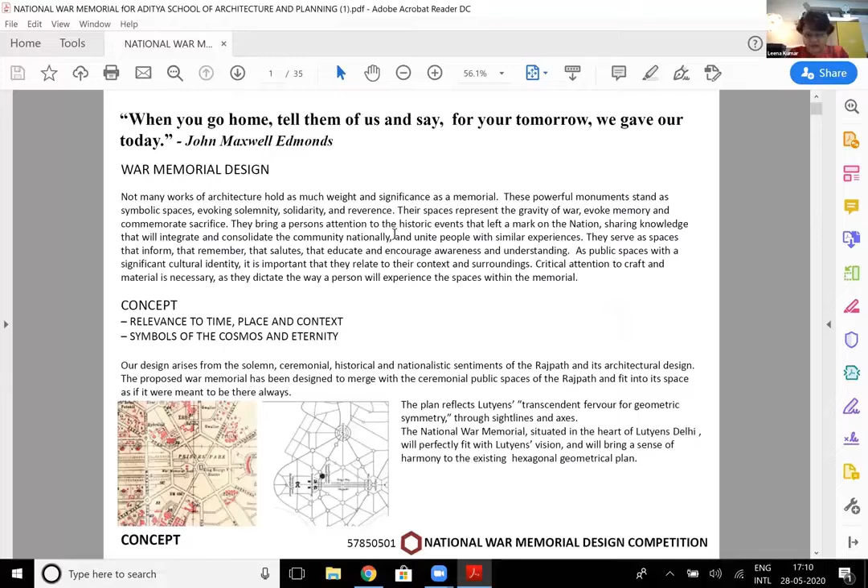And after that, everything about the country begins to make sense. This was a National War Memorial, to be placed in Lutyens' Delhi, in an extremely significant site along the Rajpath Marg.

You have the India Gate, then the Chhatri, and in line with that was the War Memorial. It was on 26 acres of land, in one of the most significant areas of the nation, on one of the most significant roads that every Indian will remember, because you see the Republic Day parade, the Independence Day parade, and it's all about this fantastic road full of history with the Parliament House, which dates back more than 100 years.

And now, of course, there's the great controversy about redoing this whole area. I personally think it's a good one.

So we began with doing a study of the whole space. We said, okay, this is in a very significant area, and we did a study of Delhi, of Lutyens' Delhi. From there, we see that all of Lutyens' Delhi really is based on the hexagon.

His whole master planning, his whole system of gardens and everything, is on the hexagon. So we began with the symbol of a hexagon.

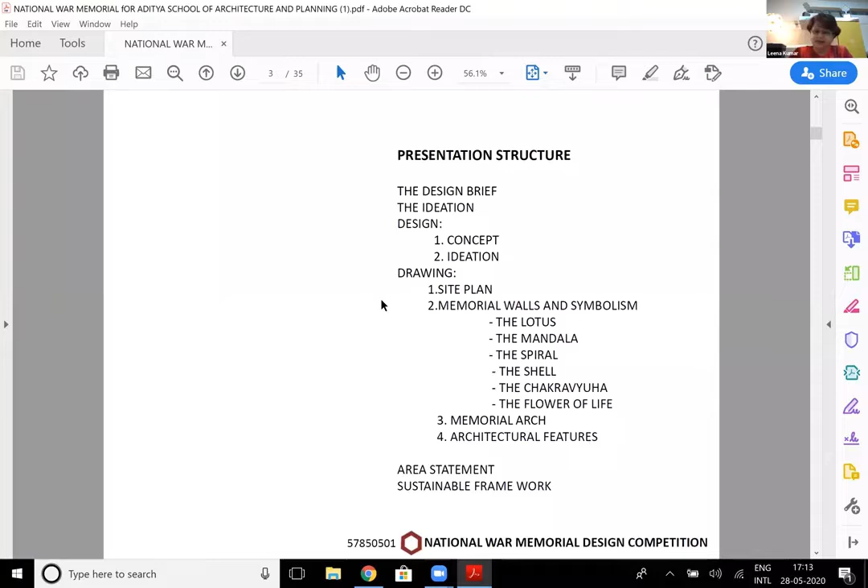We also said that we, as a nation, as a people, have a lot of symbolism in our religion and in our day-to-day lives. Everything is symbolic. If you see any of our festivals, it's symbolic. As Indians, we don't have Mother's Day or Father's Day, but we have so many religious days where we think about our ancestors, where our parents are of prime importance on a particular day, where we really delve into all of it. As a people, we are very symbolical.

This is the design of it. This is the India Gate, and this is the Chhatri. We'll come later to when we design a central monument around the War Memorial that we proposed. Our symbolic element fit within the India Gate, and within what we had designed was a Chhatri. We'll come to that later.

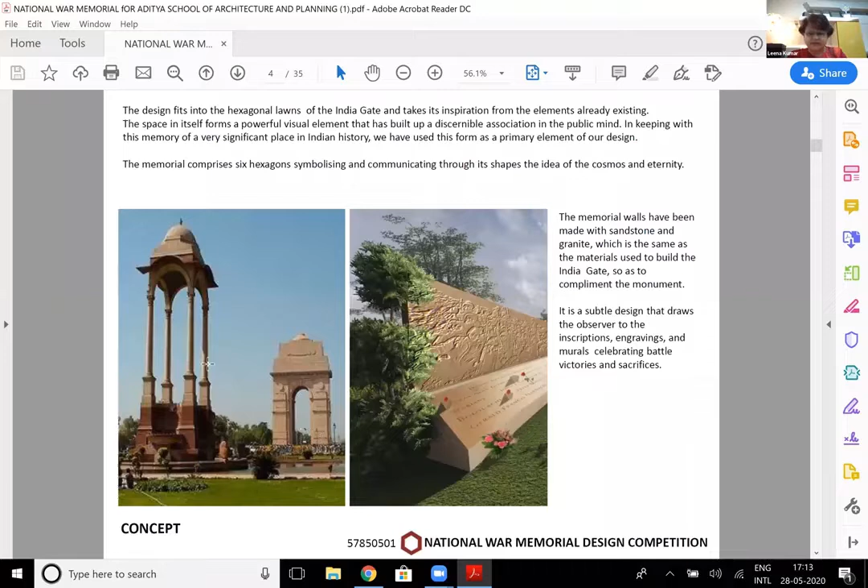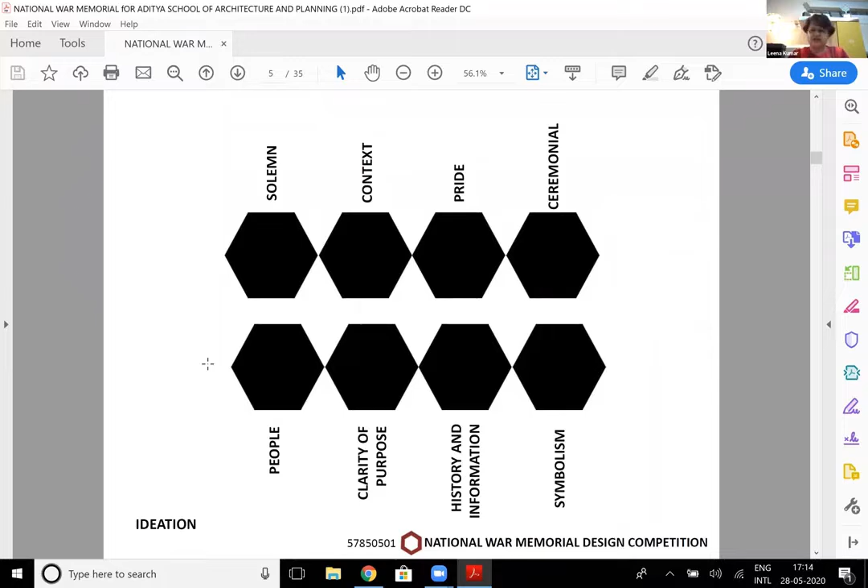Well, we began, of course, with the people of our country. What is it that we represent? What kind of a people are we? It was important that we did a design that really tied up to the nation. It was not something to be borrowed from anywhere. It had to be completely rooted to the people of India. It had to be solemn, and it must have history and information, symbolism, ceremonial.

This is the site. It forms part of a hexagon, and there were 2 lawns. Together, this whole area was about 26 acres of land.

This is the very famous Rajpath Marg. And in the center, right here, in line with the India Gate and the Chhatri, we had a big memorial arch. On either side of it, we had our memorial walls. This national memorial was for all the defense forces — not just the army, but the navy and the air force too. We thought each one could be dedicated to one of the forces, or if you had many of them, it could be dedicated to each particular war or a couple of wars together.

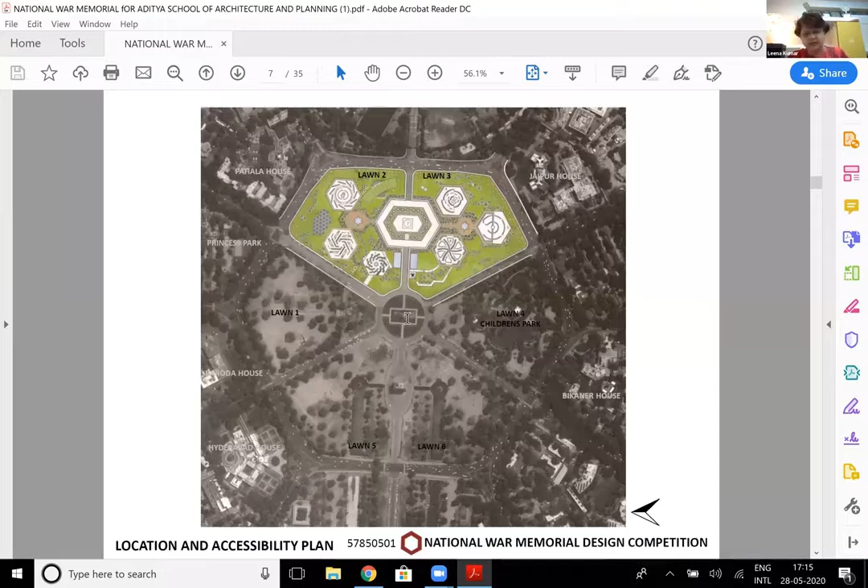So we gave them a choice, and we also distributed it into 6 areas, 6 zones, because we thought if you had everything into one, it might be just an overload. It's like going to a museum, and sometimes it gets a little too much.

All of our memorial areas began with the concept of the lotus, the mandala, the spiral, the shell, the chakravyuha, and the flower of life. In between this, we had the memorial arch.

We had an area where you could go and listen, with a lot of audio-visuals where you could hear the history of India, listen to the wars, and the memorials and what each one of them really represented.

So symbolism played a very important part of our design, but I'll go into the whole design itself. This was one of them — the lotus. It was contained within a hexagon, and this is a Buddhist symbol.

You find this symbol in many of our religious manifestations — not that the whole place was meant to be religious or affirming to anything like that, but as Indians these symbols have been a part of our growing up. I would say it's been a part of our everyday lives. We see it everywhere, and very subconsciously we identify with these symbols.

So this was one of them, the lotus, and it's really a symbol of strength in the middle of adversity, which is all what the war is all about.

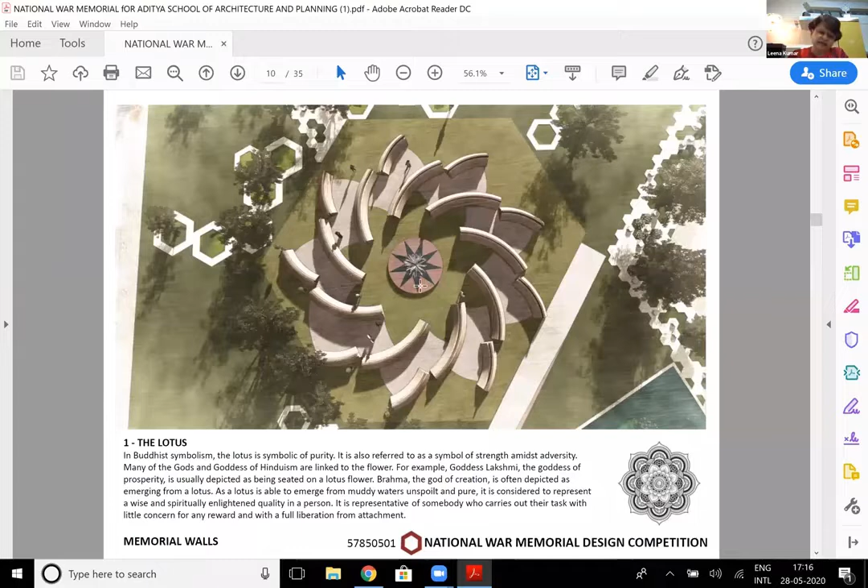These were all the memorial walls, with inscriptions on either side, always pointing out to the center, which really is the soul. We always had a water body in this. So this is one of the views of the walls.

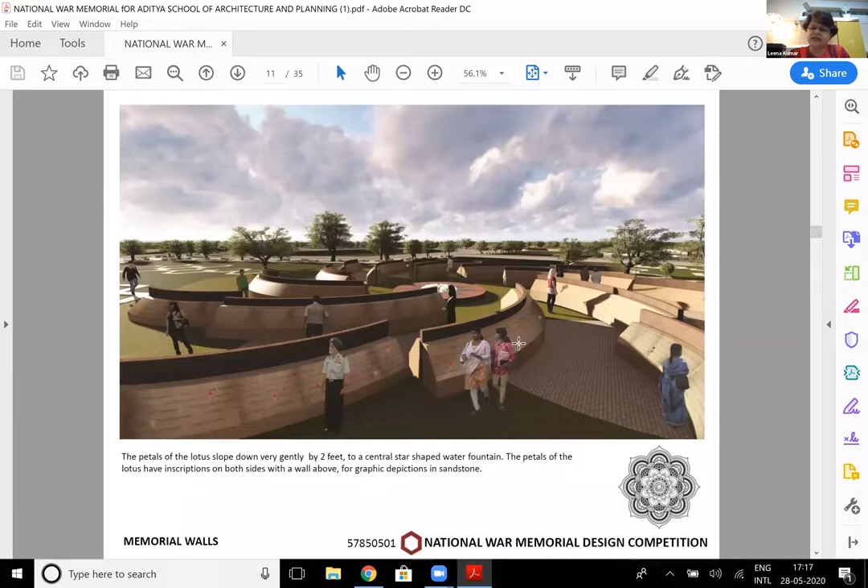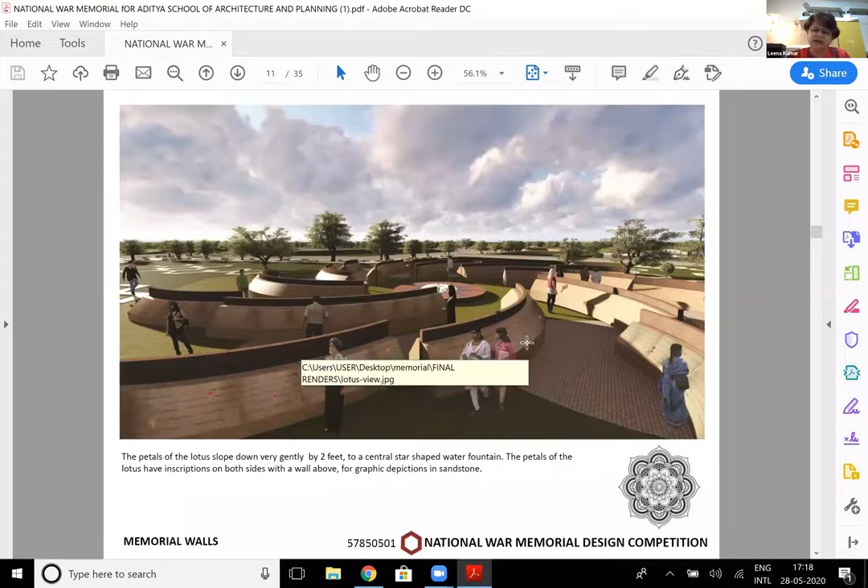You could also add some flowers, maybe some candles, so it becomes a lot more personal. We didn't want the walls to be very tall. We could have taken the whole site 4 or 5 feet below ground and had very tall memorial walls, but we thought as a concept it should be to a human scale—something everybody could stand and read very closely, so you feel closely connected, and it's not just names above your eye level that you can't clearly see.

The next one is the mandala. As architects, I'm sure we all know what the mandala means—it really represents wholeness, a cosmic diagram used very often in architectural language. In this too, everything congregates to a central water body.

Along this are benches where people can sit, with water bodies alongside. The idea was that if anyone comes here wanting to ponder about having lost a person, or someone close to them, or even if not, it invokes memories of war, of sacrifice, of courage, of a nation—if you want to ponder what makes us who we are, what makes our country tick.

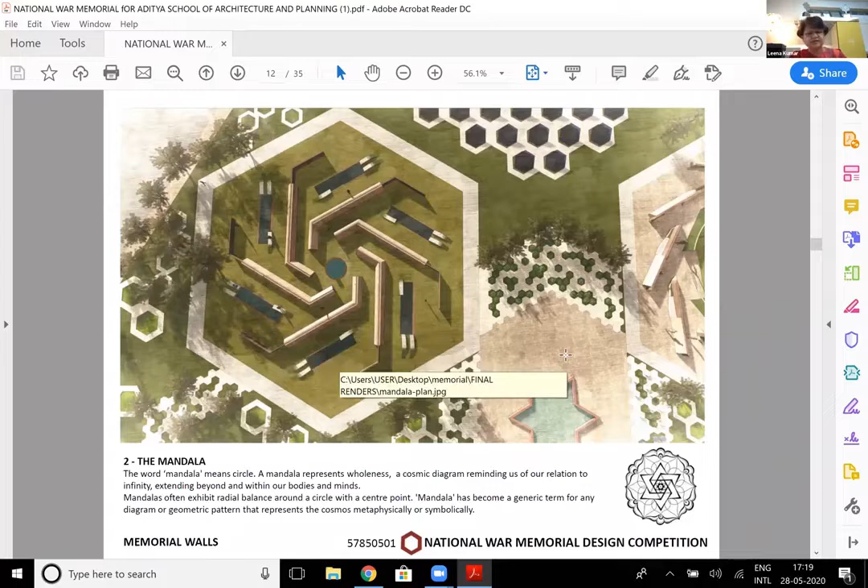We're quite a complicated nation, but in that complication we're quite a wonderful, intelligent, diverse nation. Amongst all our complexity there's such a rhythm of inventiveness, such a rhythm of personality and uniqueness. If you walk around our streets, every person is so different—we wear different clothes, we speak different languages. It's quite a nation, really. So these are all spaces where you could sit and reflect.

This was the mandala. In all of them, in the middle, we have a water body, which was to cool the space. Along the side we had nozzles to mist the whole place—that was our cooling device, because the site was open in the sun and Delhi is hot. In summer, you had to find some way to cool it, so we had water mist positioned throughout the entire 26 acres.

In this mandala, this is the seating I was mentioning—this was a water body, and along it we had seats. It ramps up from the lawn and becomes a seat. Every tree we planted was positioned with sciography, to see where the shade would fall, so that if you wanted to sit and contemplate, there was a place that was fairly cool and also under a tree. These were our seating devices and designs, spread around the site.

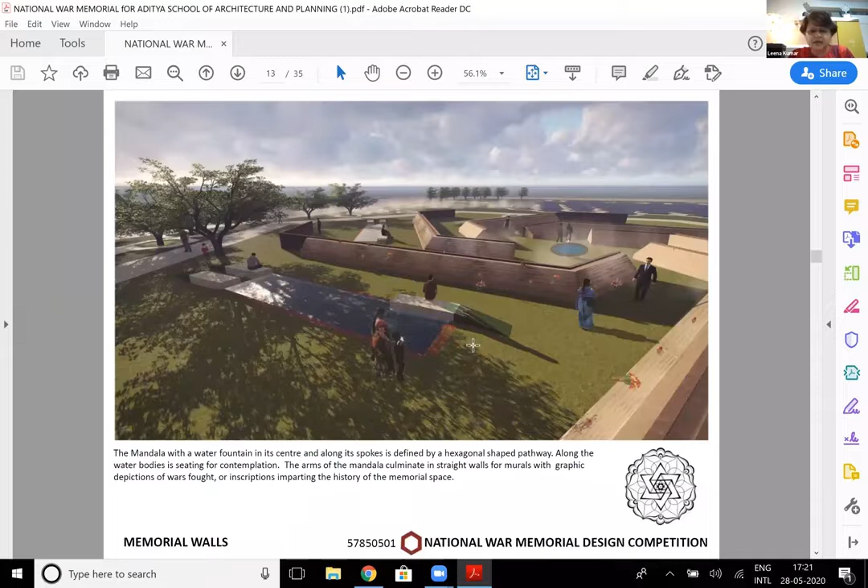This was the other one. This is the spiral. This also symbolizes cosmic rhythm, the way the universe evolved, as one of the theories.

In this one, these are all the walls that had the names of our soldiers, all the people we have lost. In the center we had a water body, a tree, and seating around the center. So you walked down, came here, there was some green, but the entire space was solemn, and that's what it really has to evoke.

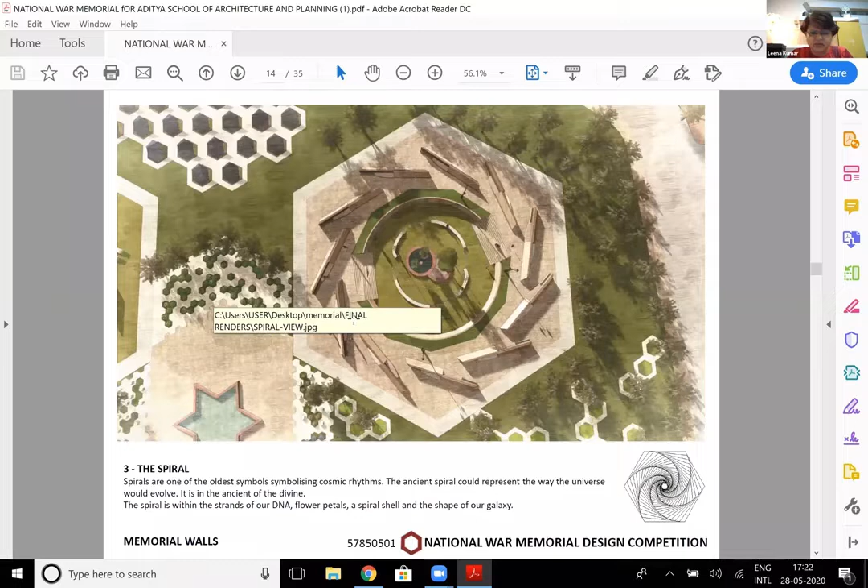And this is the design we had for our spiral. If you look at it, these are all the walls, and along the walls we had seating for people to sit, in addition to what we have in the center. So each one of our spaces was really a different form, so you also don't get fatigued by just seeing walls.

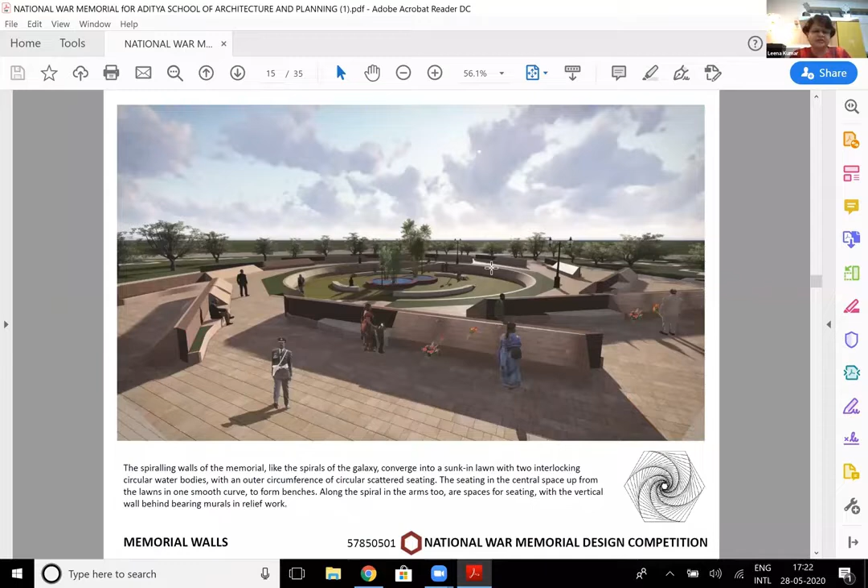Normally if you go to a war memorial, they're just walls and walls of names written. We broke it down into 6 spaces, each one with a different design, a different theme, each one very symbolic, something a citizen could adhere to and feel one with. Our whole intention was to make this really a war memorial that belonged to India.

It's not something you can take somewhere and transport anywhere else, because then it wouldn't really fit and wouldn't make sense to the citizens over there.

So this was the spiral, and the seating over here was different. A lot of it, this is the memorial wall, and then it became a seat at the end of it. And these are little places for people to put flowers, candles. This was the space in the center.

And this is the wall. This one, we came down a little bit just to make you feel like you're coming down into the center of a spiral, so we came down with steps.

And this again is the seating. We use seating that ramps up from the lawn, becomes a seat, and goes down again. So the whole thing tied up into one, and there was not much difference really between landscaping and the built form. The whole thing had to center in as one.

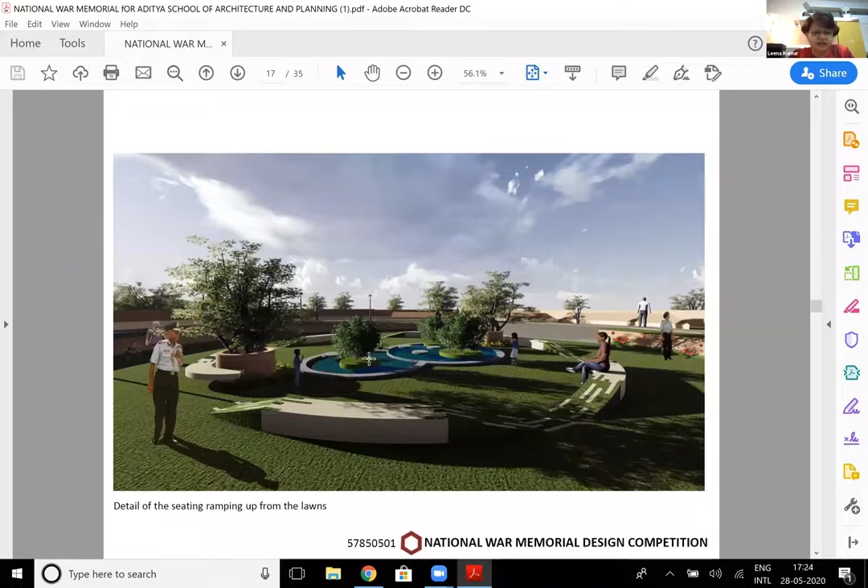So this is just the detail of what we did for the seating, and this was the 2 in the center. The whole idea, of course, was to cool the place and have it much cooler, especially where the seating is.

Now, all along these areas, we had solar gardens. It was where it could face the south west. It was also an area that didn't have many trees, so it could catch the sun, and it was designed so the angle of the solar panels could be changed to track the sun.

The intent was that the whole space was self-sufficient and self-reliant, and didn't really need power from the grid. On 26 acres there was a lot of space where we could have these solar panels, and we did this again in the shape of a hexagon.

We made it at a much lower level so people walked past it. People understood what solar meant, so you're just aware of energy when it's at your eye level instead of being somewhere else and tucked away. We thought this should really be a part of the landscaping itself, and that's how we designed these solar panels. We call it the solar garden.

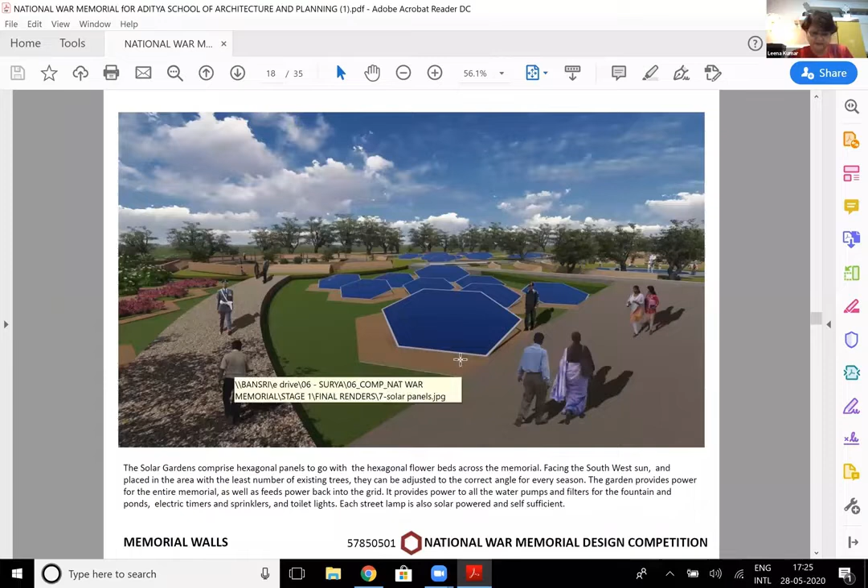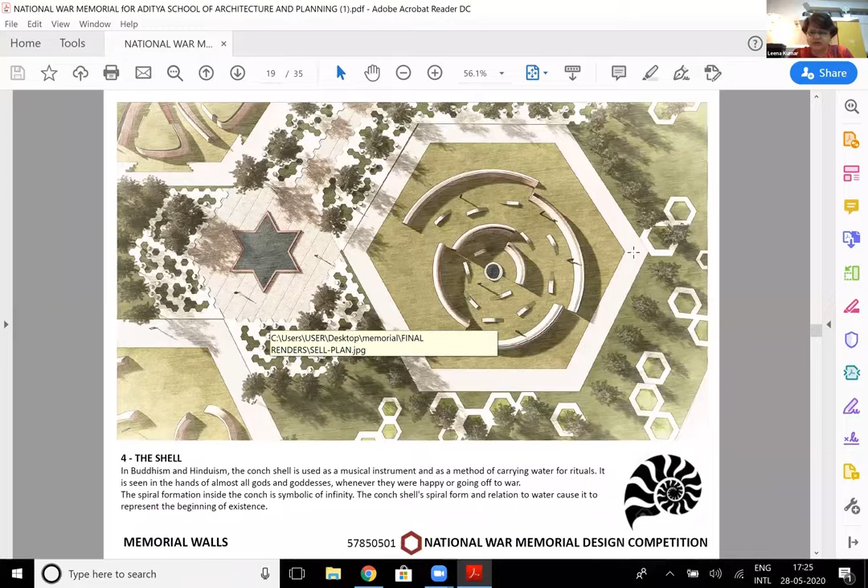This was another shape, this is the shell. We all know about the conch shell, it's an instrument used in rituals. You blow the conch to announce, very often, a war or a prayer that's going to start, and very often it was blown before you went to war. This is what this represented, and we had it in two levels.

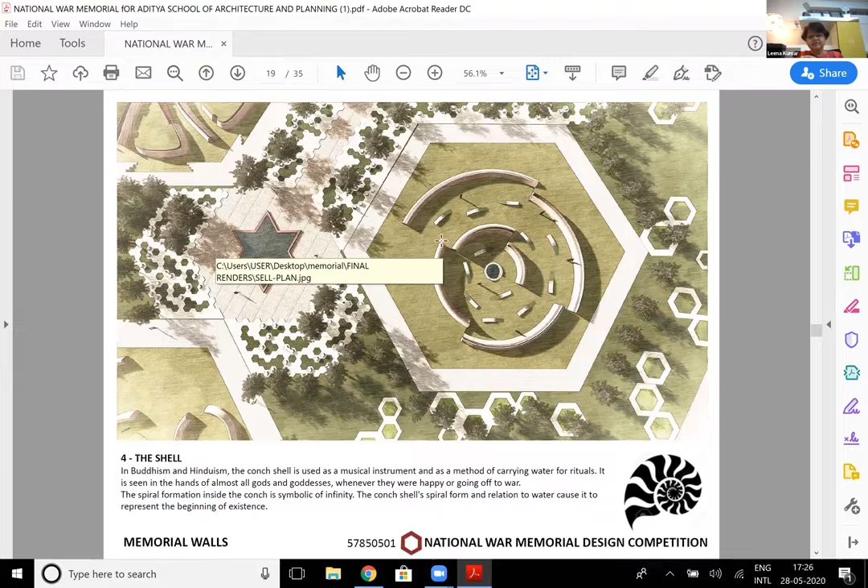With each one of them, we tried to make every one different, so a person's attention is always held, it's not monotonous. As you spend half an hour or 45 minutes on this, your attention is held and you can walk through the whole thing, because every time you enter another space, a different kind of design unfolds itself to you, and perhaps it evokes different feelings, always tying up to national integrity and the history of our country.

So, well, this is just another view, and we have the same seating. This is again the shell, and this is the area you can see.

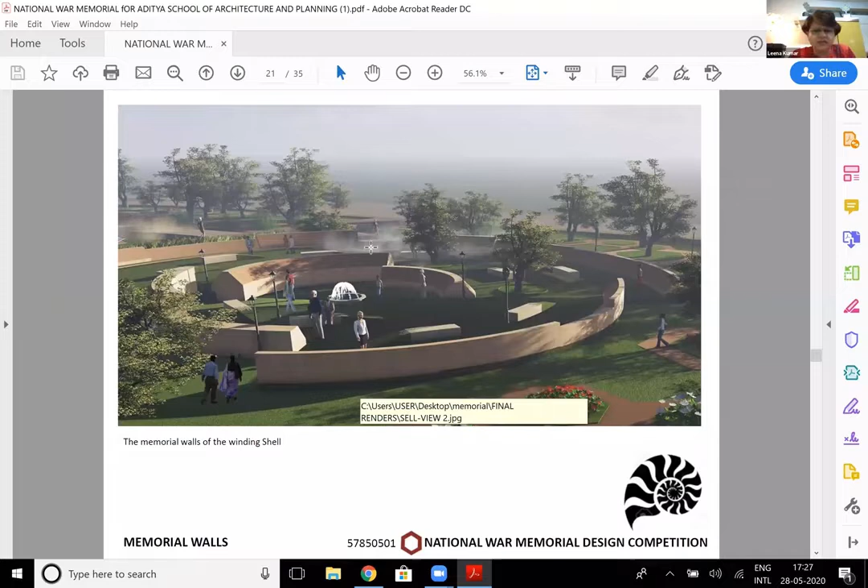So right around the site, we had points of mist. You use as little water as possible, just enough to put water vapor into the air to cool the space. When it does condense, it comes down onto the lawns. So this is what we tried to show over here, a bit of the mist. And see, if you look at most of our memorial walls...

This is the space where all the names are written, and above that we had an area for graphics. So we thought every wall would have murals on top, and the mural would really depict the war that was fought, or have inscriptions, or detail the history of what happened, why it happened, and all those who laid their lives down, to which war, which year it was fought. So there's a little more history, a little more interest than just going and seeing names.

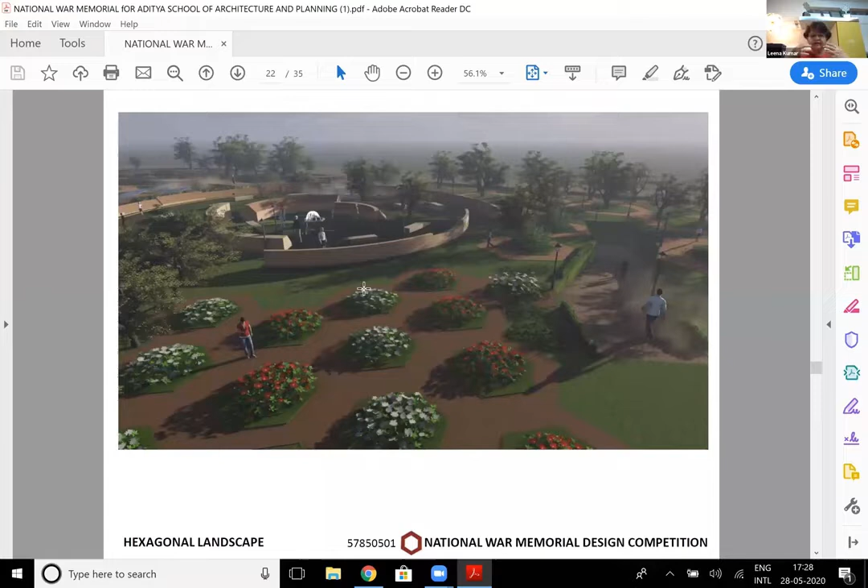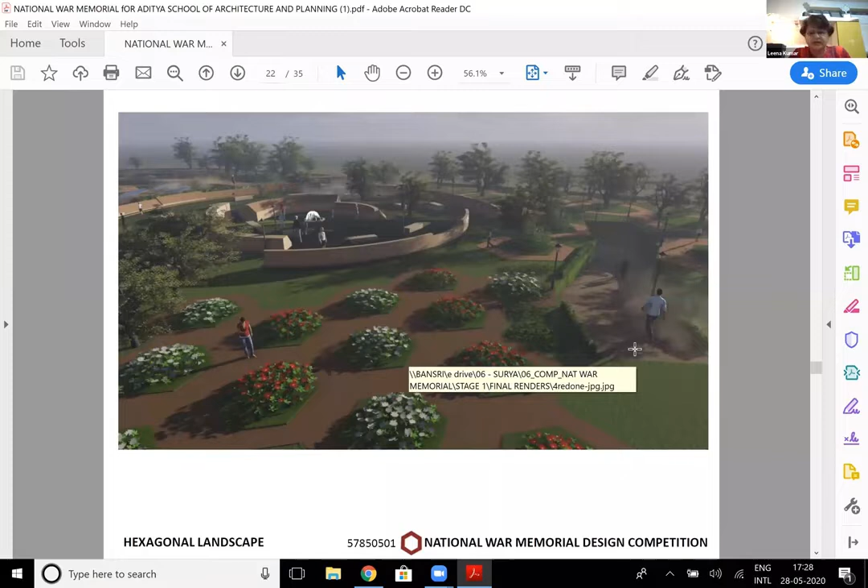Because as time goes on, history goes on, and you don't have a direct connection with the people who've lost their lives, because it could have been 60 years ago, 70 years ago, and as time goes on it will become 200 years, and the person may not have any direct connection with you. So we thought it's quite important that the walls also have an inscription on top, detailing exactly which war, at what date, between whom, and who were the people who laid their lives down for it. So the whole experience of the memorial would be a lot more educational, much more than only reading names. When it's in the near past, everybody relates to it because you remember it, because you were a part of it.

In this one, we wanted to show that even the landscaping, even the paths you go around, it all tied up to Lutyens' Delhi. So the space kind of integrated and fit into its location.

And this is all the landscaping. When anything is really maintained by the defense, it's always a beautiful piece, and we thought we could take advantage of that and have very detailed landscaping, where each one would have flowers, just flower beds, and you walked around it.

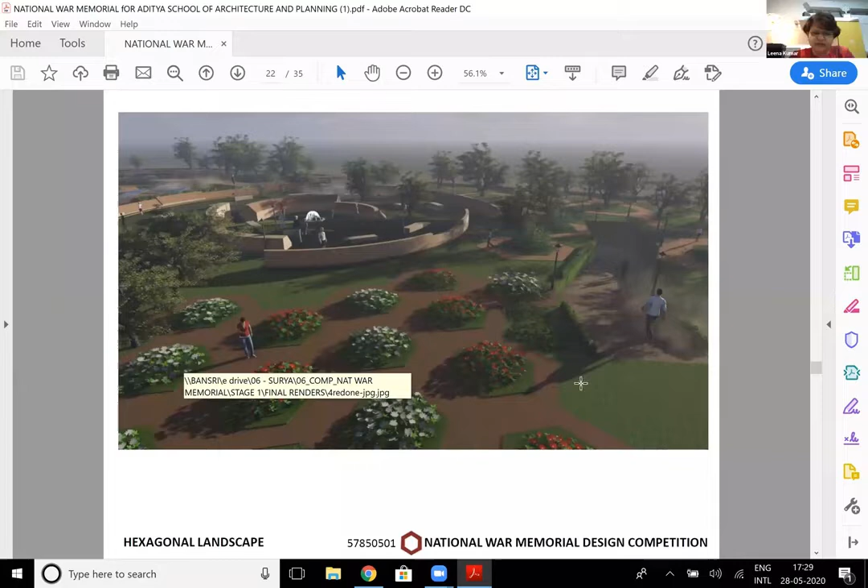The whole idea should be solemn, it should be peaceful, it should be a space that lends itself to how you conduct yourself in a dignified manner. I believe that's one of the main objectives of architecture. When you design a space and it's well designed, it kind of dictates the behavior of the person who experiences that space, and all this was to lend itself to that.

This is the Chakravyuha, a formation in the army, supposed to be an extremely deadly formation. All the armies that used this would always win against their opponents. Well, we don't have these kinds of wars anymore, thankfully, but this is a formation that certainly the defense forces would understand and feel a oneness with. So this was another one of the forms that we used.

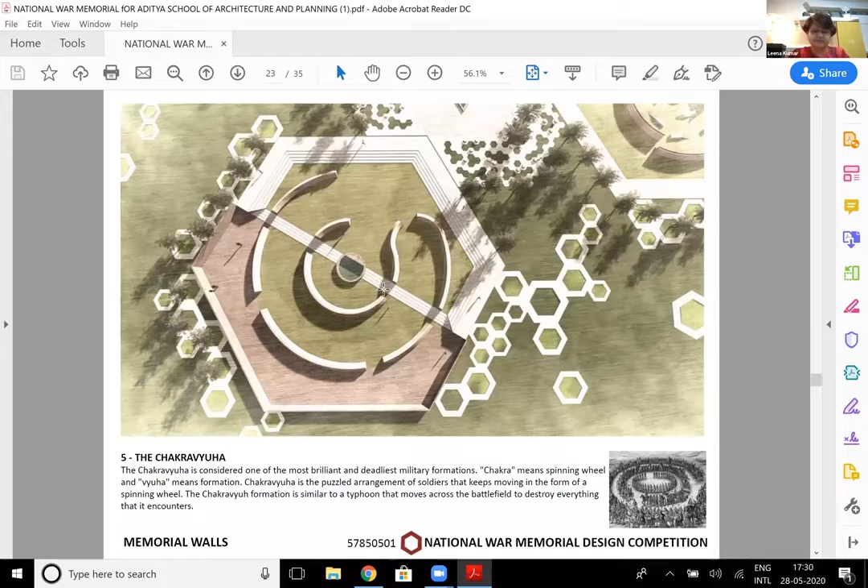Well, this was the Chakravyuha, and this is the flower of life. So everybody walked here to a central point. These were raised lawns, and amongst that we had seating along the sides.

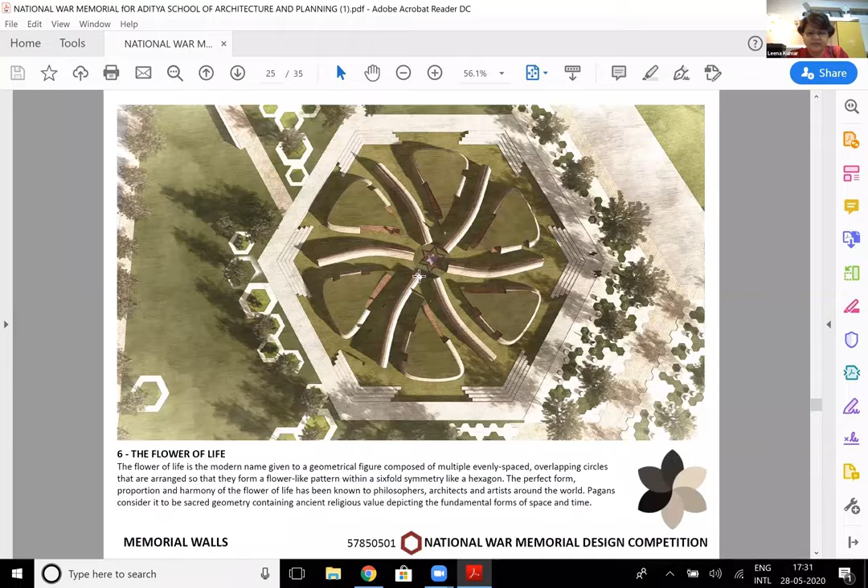So we walked down a little bit, to this space, just so we thought we could have some walls a little higher, more than 1.5 meters, and we had mounds. So this was the space, and this was the seating that we did here. We had raised mounds of lawns, and then we had seating.

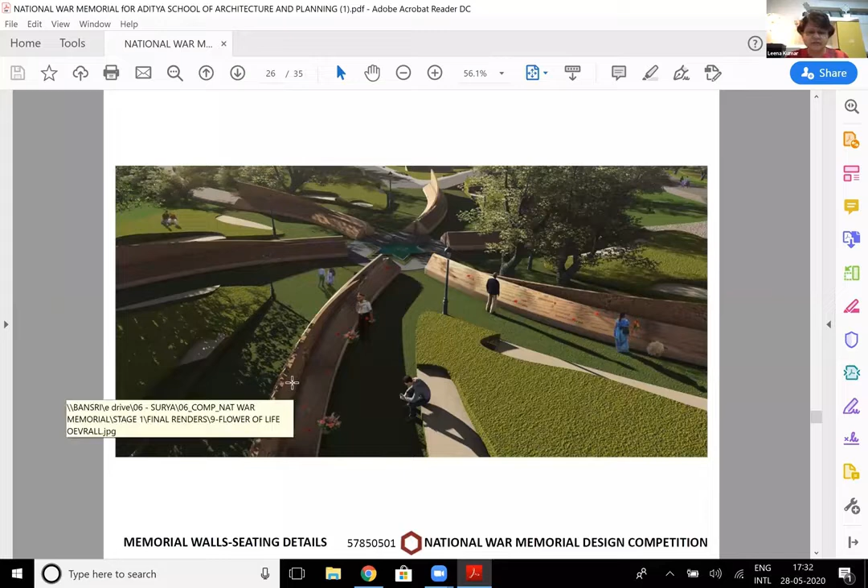We tried to put in elements that were within the whole concept, but were different, so it retains the interest of everyone who comes here as an architectural space, besides only being something where you just read names. So this is what we were saying, this is the space, these are the walls where everyone's names were carved out. And this wall that went higher up would have graphics, inscriptions, writing about the war. All our memorial walls were designed that way.

This is the lotus, and this is the inscription wall. The portion above was the description of the wall itself, and it was all two-sided. We said you could add on names as it went on.

You walk down to this area, and all these places could also be spaces to sit. This is really seating all around the trees, and of course these were the places to sit in the middle of it in the landscaping. Those were the memorial walls.

And then there was a ceremonial arch. This arch is where the Prime Minister was expected to go at every solemn function, to commemorate victories, or commemorate just losses of life, heroic deeds.

What we had done here, actually a lot of those who were shortlisted had sunk this down below this level so you didn't really see it. But what we had done was make this memorial arch fit exactly within the arch of the India Gate, and within this arch was a chhatri.

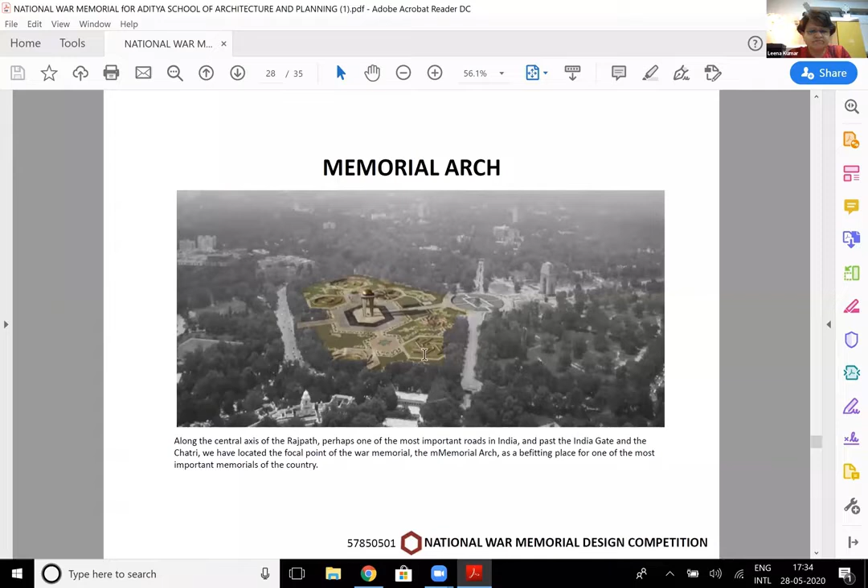So we thought we should make another monument that's as significant really as the India Gate and the chhatri itself. This is the area where we had all the memorial walls, so this was the design for the memorial arch.

We said, what material do we use? It must go with what has happened, the language of it, but it should also be symbolical that time has moved on. So really we did this arch in concrete, and we connected them with glass.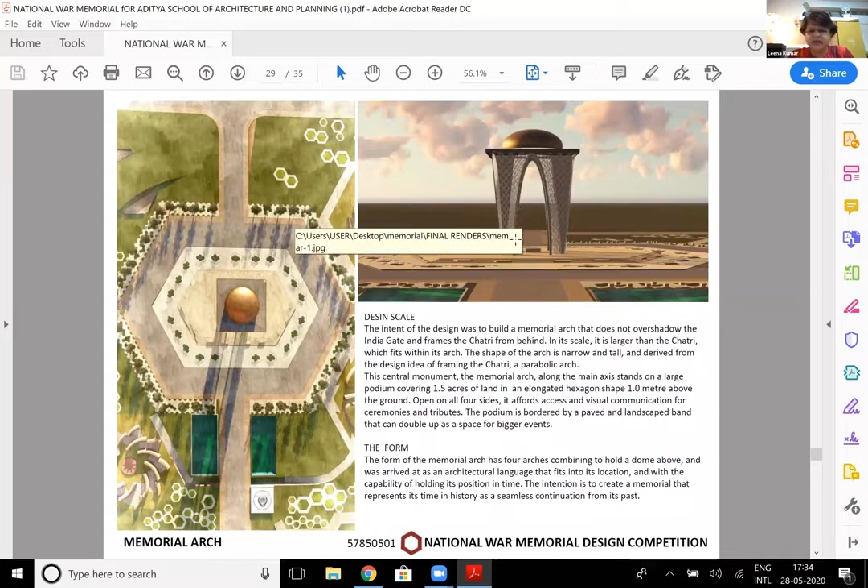So it forms a fairly solid mass. And in the concrete, we said we would have inscriptions of all the prime ministers and inscriptions of the heads of defense staff.

So anyone who comes under this really reads all that. And we had a copper dome on top with also inscriptions of really symbols. And that's how we arrived at this.

So this has 4 arches, and the 4 arches combine to hold this on top. They're tied together with a trellis of glass. So we used the material of glass and concrete because we wanted it to symbolize time.

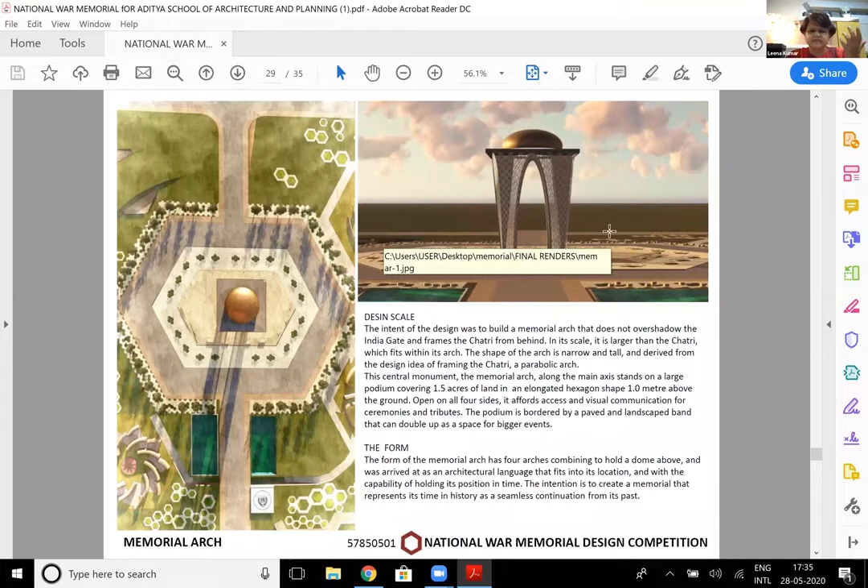The rest of it is all sandstone. In fact, all our walls are all of sandstone. And under this is the memorial chakra.

So this is the place where the Prime Minister would lay the wreath, and this is where all the ceremonies would happen. And this was the design of the memorial arch.

This chakra was made in copper on a granite pedestal, and this really is 1 meter high. Sorry, the pedestal is 1 meter, this is 2.5 meters. So really in scale, this chakra is 3.5 meters in height, and that was the height to fit inside the India Gate.

So this was by and large in concept our memorial walls. This is inscriptions, and this is where the person's name was. And we had little places where you could keep a flower or a diya.

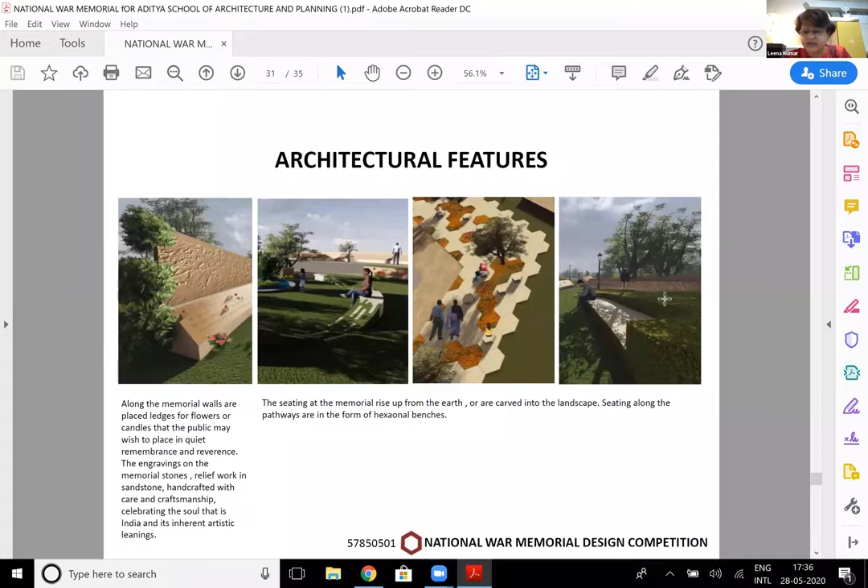This was the seating, and all our landscaping was in forms of hexagons, and we distributed along it flower beds and also benches for people to sit. This was another one of the features that we showed you, for benches.

Close by, in between, see this is the solar park. This is one of our memorial walls. We had an underground space, and above it was just a mound for people to walk.

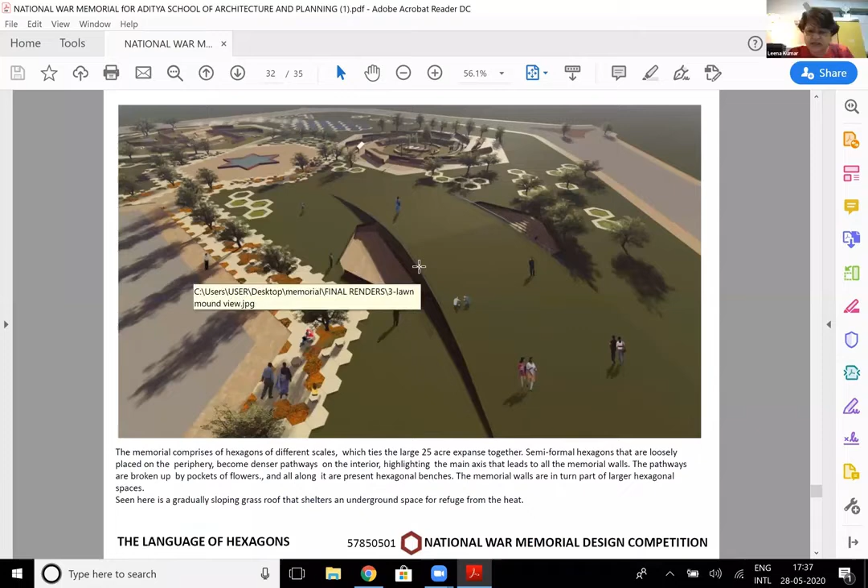This space was where you could go and learn about the history of India in terms of all the wars it has fought to become an independent nation, what we have fought against the British, and what we have fought against all the other invaders who came.

So under this was a space where you could go, put on your earphones, or there would be videos, or there would be movies, all to explain the history of the country. And it formed a mound on top so people could walk and go across.

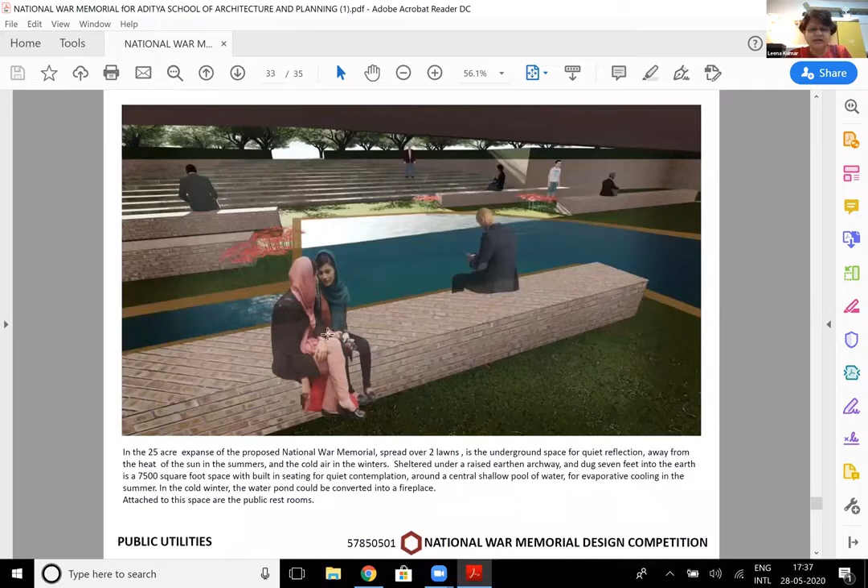So this was inside. Under that, it was just a water body. It had benches, and places for an auditorium, which we haven't shown here, but that was the intent of the whole space. Also, in the hot summer monsoons, it was a place where people could go and sit inside.

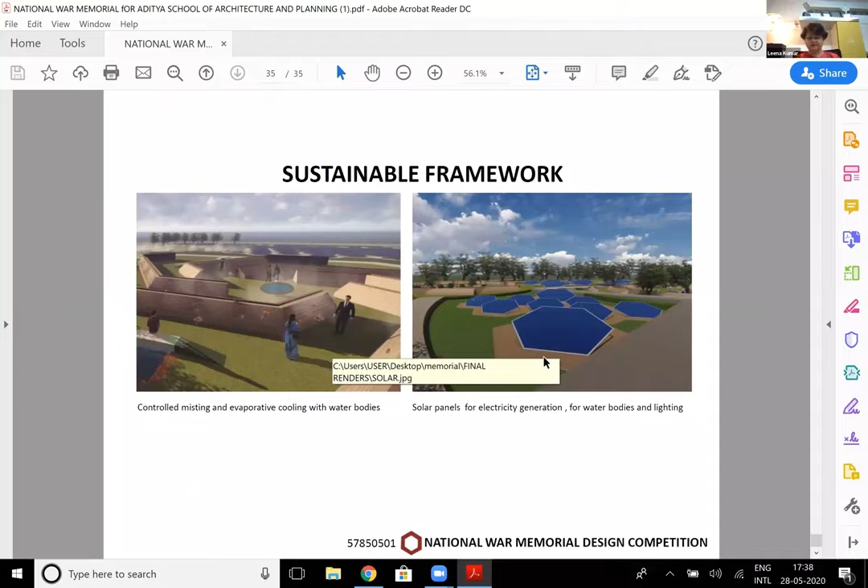This is the sustainable framework. This is the misting, and this was the solar park. So that's what it was. That was our design.

That was the design that we did of the National War Memorial. Well, I think it's all done now, it's finished, but this was our scheme. They only wanted everything to be finished in 4 or 5 months.

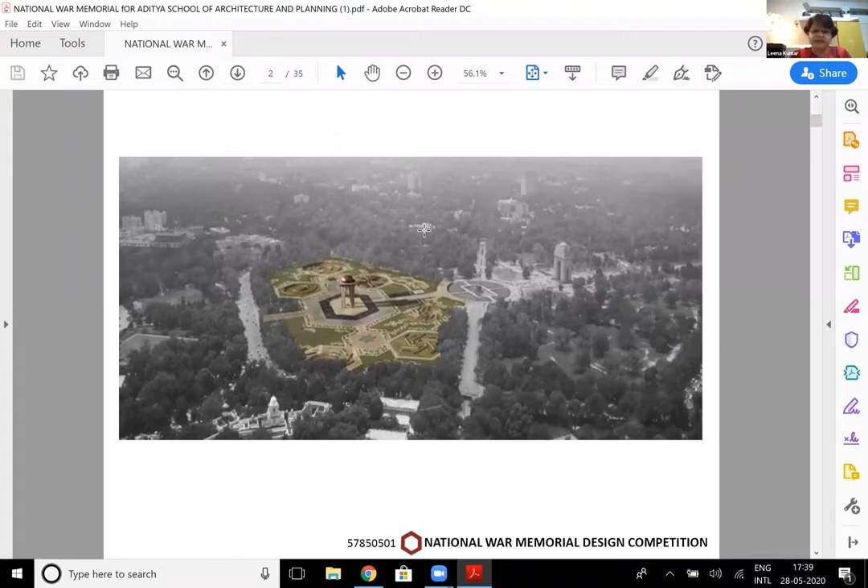We were quite sad that it wasn't built, because we thought it was symbolical. It was so well rooted in its space, in its time. It's something that, well, we thought just fitted into the whole design, into the whole idea of Lutyens Delhi, into the whole idea of a nation, into the whole idea of symbolism. And we did believe that all of this would...

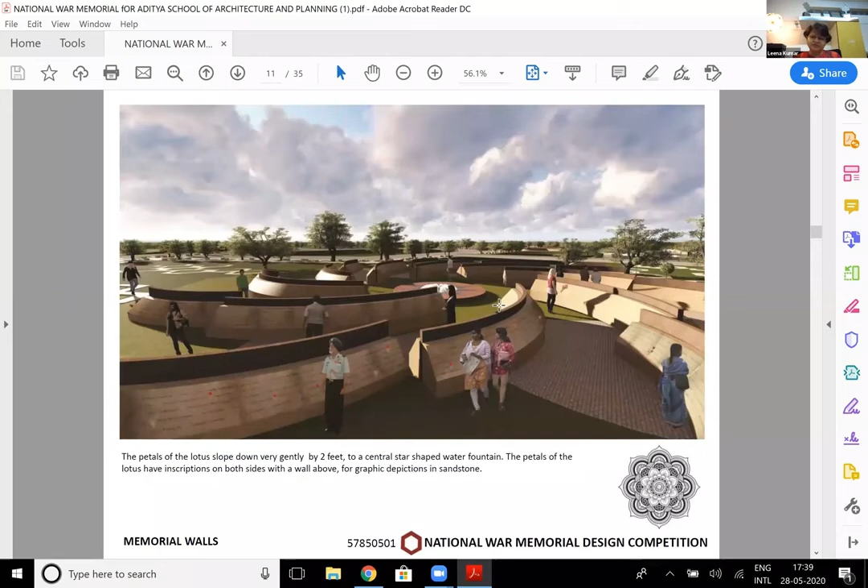It's something that as Indians we could all relate to so well, and so without any difficulty at all. So that was the design. And if there's anything you'd want to ask, any questions you have.

Before we conclude, I'll tell you a little bit also about the Indian Institute of Architects. Sure, ma'am.

So if there's anything that anyone wants to ask, I know it's a difficult project to really ask any questions, because it's an idea. It's okay. But well, yeah ma'am, we have a question from a student.

Yes, they want to know why there are no graves here in the memorial. There are no graves. Yeah.

Well, for one thing, a memorial... One is, as a custom, I would say a lot of us in our country don't have graves, but we cremate. One thing.

Yes, the other thing is that this memorial is not really a place where you would have, and even if you did bury, it was not really a place meant to bury people as much as to invoke a certain sense of history, of togetherness, of oneness.

And if we did have to have graves, it's very difficult also to add on. Yes, this really was not actually a graveyard. Very often, a memorial is not. It's a place where a person who is connected to the grave would go. It's not a place where all public would go.

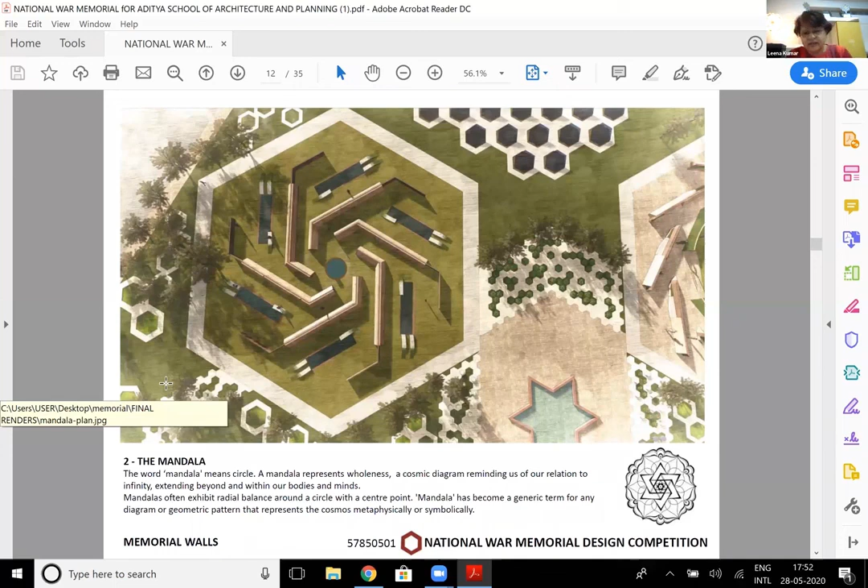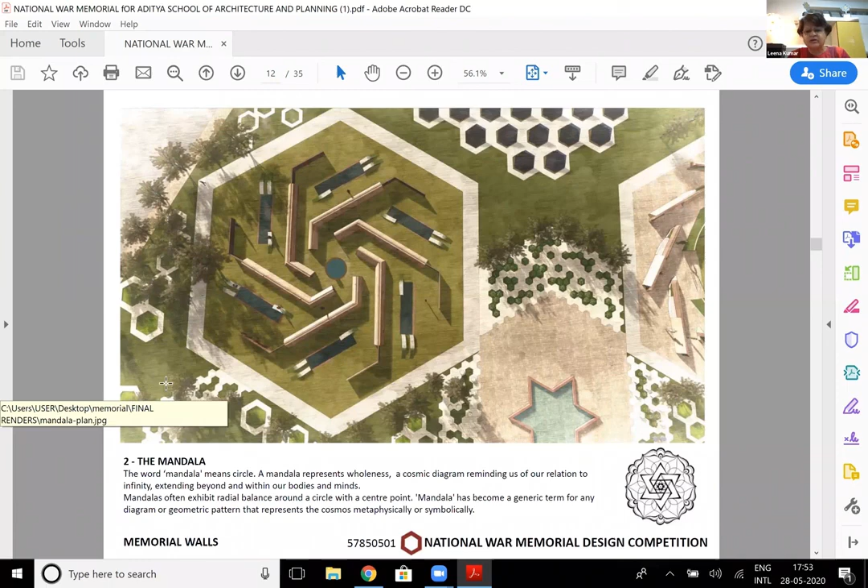The other thing also is that as the nation is growing, projects are going to become bigger, much more complicated, bigger in scale. And you would probably want to bounce off ideas from people. You would want to share information, share knowledge, or if you're in trouble, you want to exchange ideas with someone, thoughts with someone. So with all that, being a part of an institution is quite important.

And so when you finish, be a part of it. It's good - I mean, after all, it is our institution. It's not yours, it's not mine, it's only ours. And very often if you see the strength of a nation, many times it's the institutions that build it - you see the health of an institution, and you can very often say that is the health of a country itself.

So when people participate in their profession, it becomes stronger. And I think it's important that we all come together, we stay together, we learn from each other, because from there we start growing. So I would say it's quite important for students to join the institute.